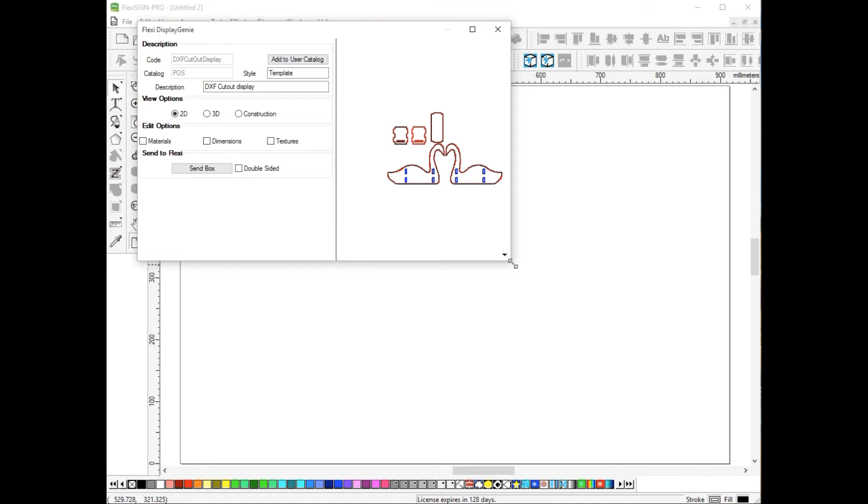What we have is, if we go into 3D, you can see we have this nice display here, and I call this a basket display. You have this area in here that's a basket that you can put products in, or anything that you want to display, set on a counter or whatever.

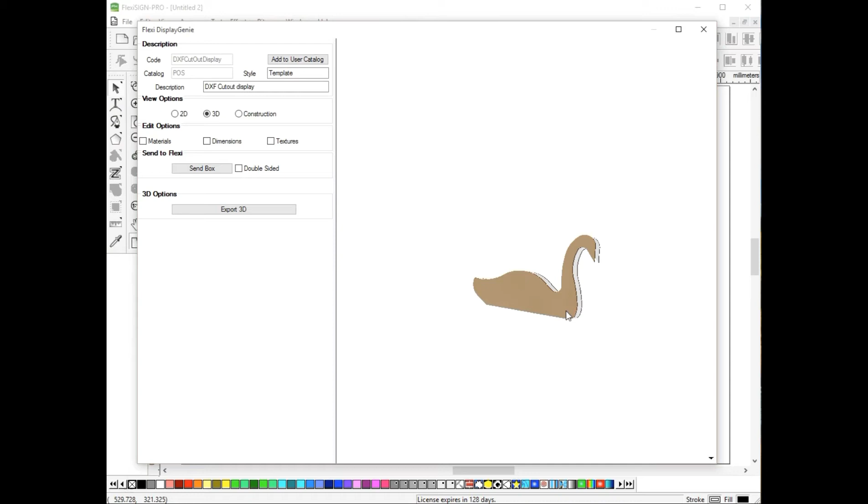You can see that this is just a standard DXF shape that is imported into Box&Display, and then Box&Display gives the design and the path for cutting out and everything.

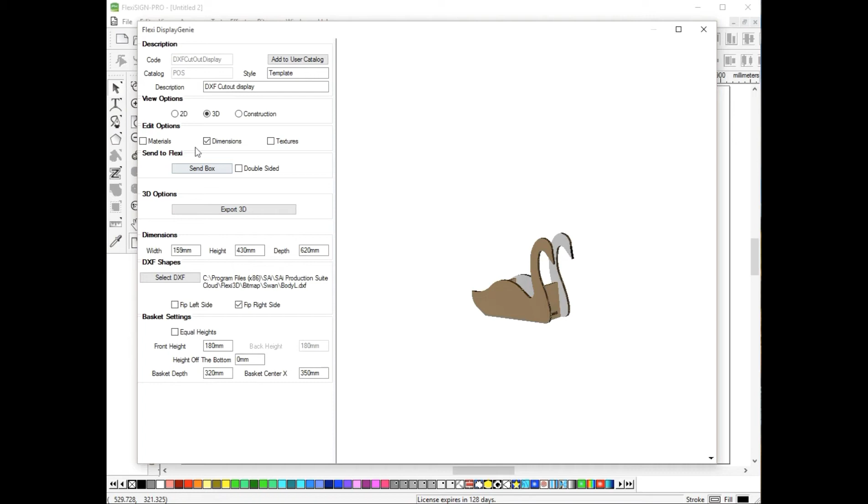So when you go to dimensions on this, you can set, let's go back to 2D, and you can set the width, the height, and the depth.

The depth is actually from the front of the swan here back, don't want you to be confused with that. The width is, if you look at this bottom here, from side to side, that's the inside width. But this width here is the outside width with the thickness of the material.

These blue lines, these blue rectangles here, are actually a certain kind of machine step that allows for what's called a kiss cut. What it does is your tool will cut all the way through the part except for the last millimeter, so it saves the skin on the outside, and the pocket doesn't go all the way through.

But then you see that you have these tabs on the sides that will go into these slots, and then you also have a slot in the front and back that will go into the bottom to hold it together. And of course it could be glued together, or if you wanted to run some threaded bolts through there to hold it together, that would work as well.

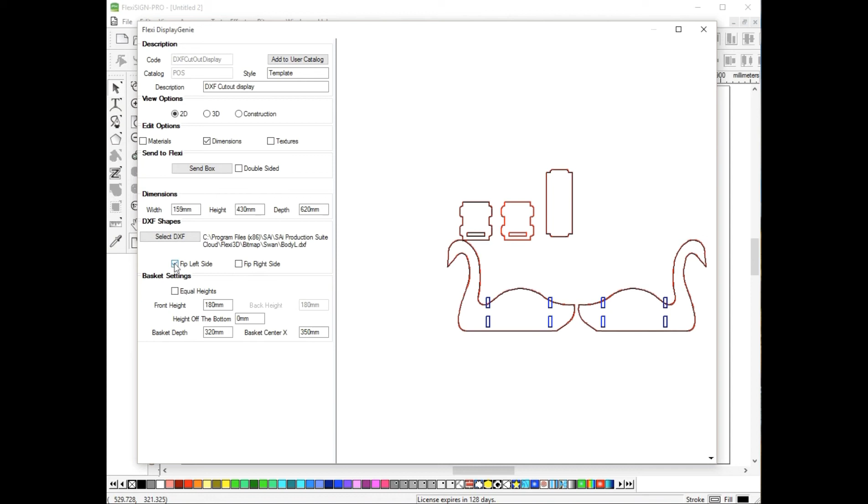You also have the ability to flip the sides, so in case you want them to be the other direction, you could do it like that, or if you wanted them both to be the same direction, you could do that. So it just depends on how you want to build it.

The basket settings, you have the equal heights, which will set the front and the back the same height. That needs to be changed, I'll fix that, but it actually needs to go the other way to where it's active when this is not checked. That will be changed before this goes out the door.

The front height, like I said, right now is governing both parts. The height off the bottom is the bottom of this front and back panel, and right now it's at zero because it's sitting here. And then you have the basket depth, which is the distance from the outside of these blue slots to the outside of these blue slots.

And then the basket center X, this is wherever the center is on that part, whatever you want to call center, you can set that, and then that would work. Your two front and back would work off of the center.